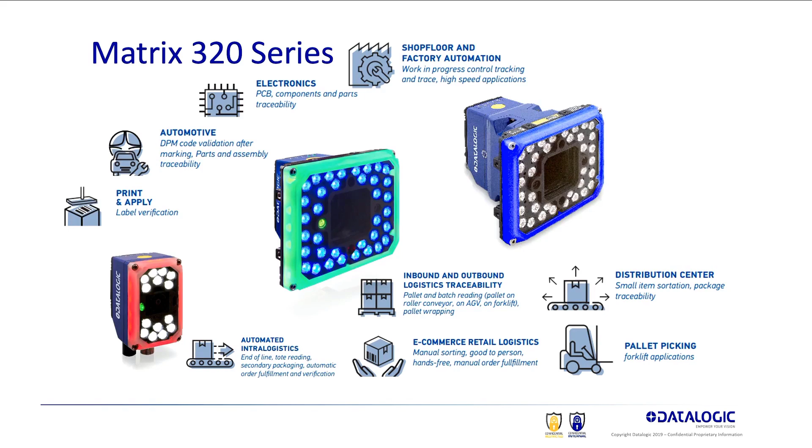Some of the highlights of the product: it uses a smart sensor, so we can detect low contrast images and still detect the barcode even if there is low contrast. We've got a multi-core platform, a dual processor that allows us to dedicate one processor to reading the barcode as fast and efficiently as possible, and a dedicated processor to image saving. When you have an imager, image saving is key. You might want to see the image in real time of what you're doing, or you want to use the images for forensics after the event. If you got a no-read, you want to be able to go and analyze the reason for the no-read or a behavior that's not expected by looking at the images.

One of the nice features of this product, which we'll see in the live demo, is the 360-degree light. It is a very powerful ring of light around the illuminator that turns green when you're successful and turns red when you're not. You'll see in the live demo how nice it is and what a nice feedback it is to have it on the reader.

Definitely. Always comforting when you see that green light happening when you're doing a machine setup, for sure.

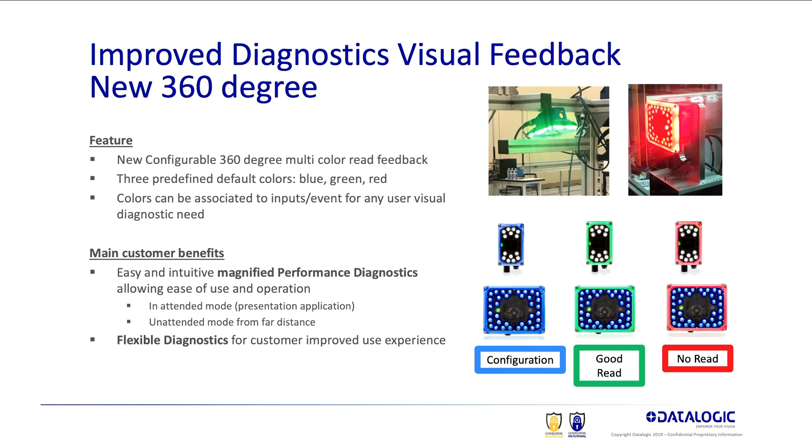One of the main applications of the Matrix 320 is for hands-free use. We have a couple of kits that Datalogic produces. You usually position the reader overhead, and it comes with a cable and power supply - everything is included - and a USB connector that connects to the computer the same as your handheld does. The idea is to replace the gun with this hands-free presentation. This allows you to have both hands free when you read a barcode, instead of having one hand taken by the gun and the other hand carrying product. This allows you to go faster, especially when you have big or bulky products that require both hands.

And having a USB connector, it communicates to the PC exactly like the gun. So from all the software upstream, it makes no difference to have a gun or to have a presentation Matrix 320. The last slide that I want to share with you is about visual feedback.

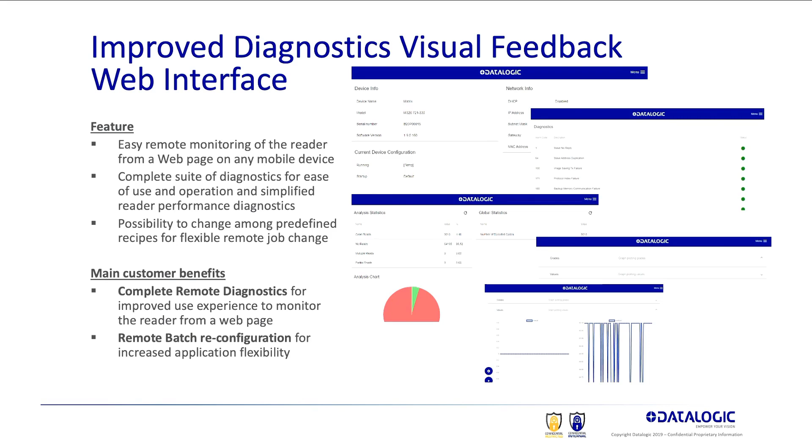With any browser, you just type in the IP address of the reader, which is connected to Ethernet, and it will come up with a window with different options where you can see the performance, see images live, and get diagnostic feedback immediately if something is wrong in the reader. Those green lights on your screen will become yellow or red to indicate a problem, so you get immediate feedback on how the reader is performing. You can see the barcode coming through, and that doesn't affect the performance, so all of this can happen during live production. This is one of the many advantages of Ethernet barcode readers.

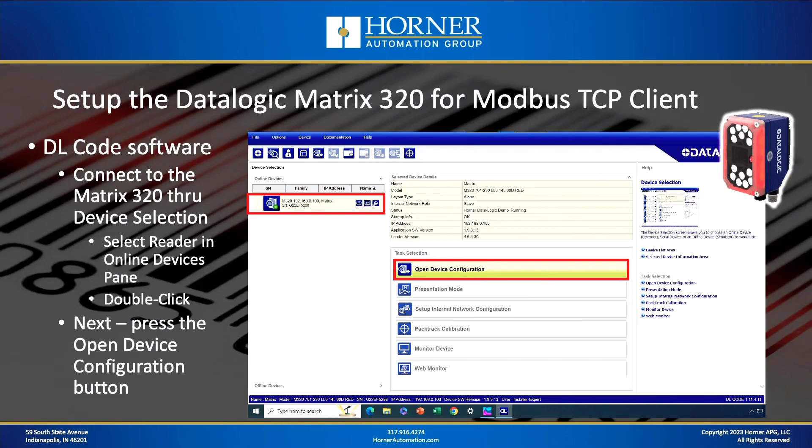Make sure you set the user level to expert, and you can do that right from the software. The next thing you're going to do is communicate or connect with the 320. Over Ethernet would be the most likely approach. It'll show up in the software along the left-hand pane. You double-click on your scanner as it appears, and then press Open Device Configuration to go into configuration mode. Once you're in configuration mode, you get a menu along the top with 1, 2, and 3 from left to right.

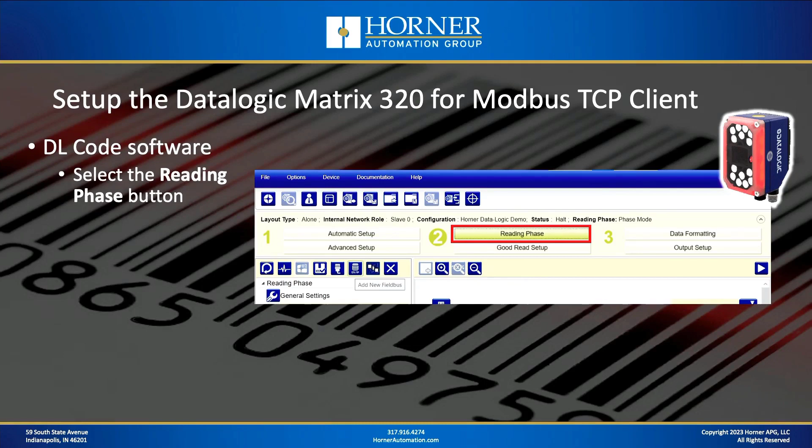You're going to focus by starting in on the reading phase. Select reading phase, and once you do that and you're in expert mode, you can click on a field bus icon that will be there and effectively add a new field bus. When you press that button, you're going to want to add Modbus client - that's what we're working with today.

Once you've got Modbus client added as a field bus, you click on Modbus client, and then on the far right-hand side, you're going to get all the Modbus parameters show up that you need to configure to get Modbus TCP working. So let's start with the key parameters that need to be changed, starting with the start register.

So what is the start register? By default, the barcode scanner will write the barcode data to Modbus holding registers 40,001 and forward. If you enter a start register of 0, that represents an offset of 0, which means the barcode data is going to go directly into Modbus holding register 40,001. Now, Horner OCS has a direct mapping of holding registers to internal Horner memory.

40,001, that particular holding register, is mapped to AQ1, and almost certainly there will be a conflict with other analog output data or high-speed counter data or something like that if you use that offset of 0, which is the default. So what I did in my demo, and what will probably work for you, is a start register of 99 - an offset of 99, which means the barcode data is going to appear starting at AQ100, and almost certainly there'll be no conflict in that area.

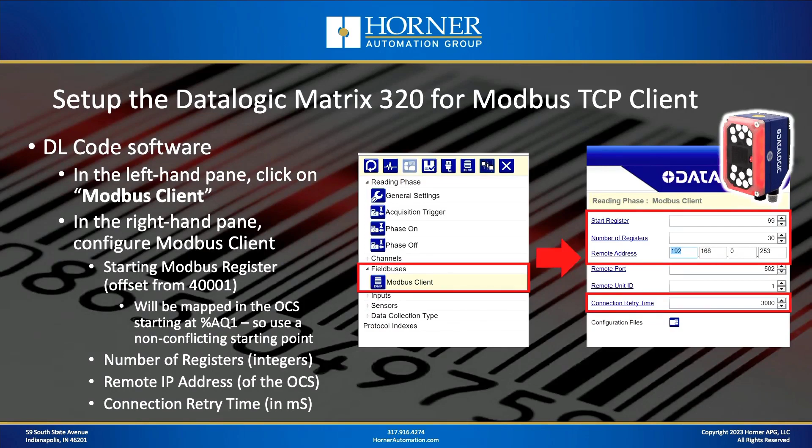That seemed to work very well. You could probably set it a lot shorter than that as well. So those are the basic Modbus TCP parameters for the 320.

All right, so we still have some work to do. We need to do some I/O mapping, starting with phase on. What is going to actually put the scanner into read phase, the phase in which it's sitting there waiting to scan a barcode? You're going to select phase on in the center pane, press that button, and in the right-hand pane all the different things that can cause read phase to turn on will appear. You're going to select one of the Modbus bits there as the bit that causes the scanner to go into read phase.

In my case, I selected the very first one, and that is not mapped to holding registers, it's mapped to input registers, or input bits. So in the OCS that means I1 through I8, bits 0 through 7 on the screen correlate to I1 through I8. In my case I made it I1, so that could effectively represent a real-world photo eye or something plugged into the OCS through I1, for instance.

Once you've selected which bit you want to cause read phase, you need to describe the action, and you want the leading edge of that bit to cause read phase to turn on. Now what will turn read phase off? That's the next slide. You click on the phase off button, and you select the very same bit that turned it on, but this time select trailing edge. So when that input bit turns off, you leave read phase.

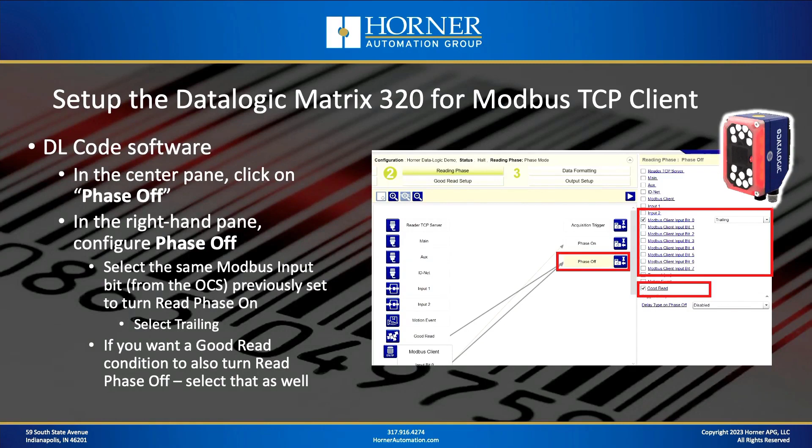One other thing that's useful, that Mitch, my local sales guy from Datalogic, recommended was that I also turn off read phase with a good read. So you turn it on with the input bit being turned on, and then as soon as it has a successful scan, it will turn itself off and go out of read mode.

A little bit of work left to do. We've configured the input side of things, what puts the scanner into read phase. Now we need to configure the output bits that are being written by the scanner to the OCS that give us status. The two simple ones are good read and no read. Let's start with good read.

In the center pane again, after we've pressed the output setup tab at the top, we press the good read button, and then we can map that to a particular Modbus bit. These will be output bits, mapped to Q1 to Q8, so 0 through 7 on the screen matches Q1 to Q8.

In my example, I selected the 7th bit to be used for good read, and that turns on, or is written, whenever a good read occurs. I also configured it to automatically turn off on a timeout, 1 second I believe is what I have it configured for.

Similarly, on the bad read, we also need to configure a different output, the bad read output, again correlating somewhere between Q1 and Q8. We wanted to turn it off automatically after a second or so. That's a good way to configure it.

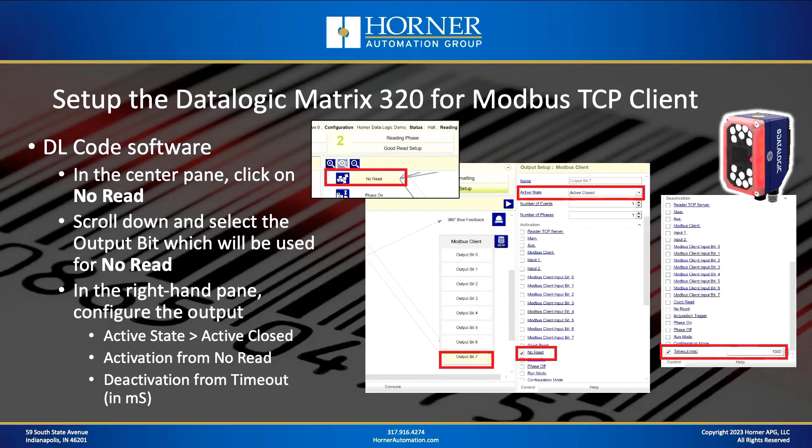When we're done configuring the output, that's the last step in configuring the reader. At that point we can save our file, save to the device, and exit the software, and things will just start running. That's my experience, at least.

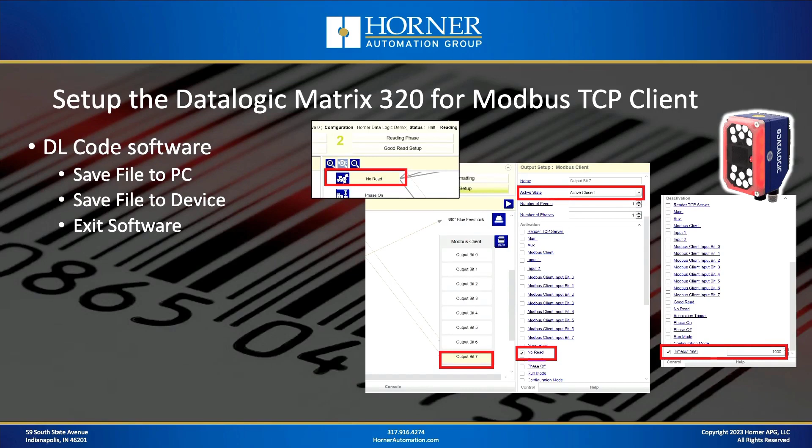On the Horner OCS side, remember the Horner OCS is acting as the server, so there's a lot less to configure. You basically go into the hardware configuration and click on the Ethernet port that is going to be acting as the Modbus TCP server.

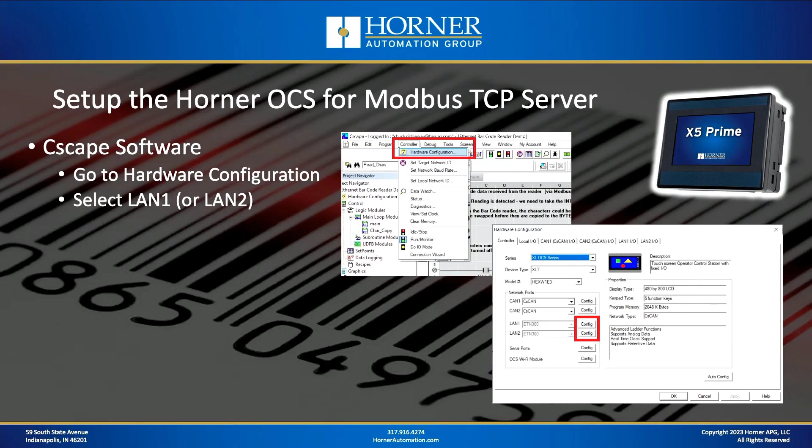Once you've selected that particular Ethernet port, you need to make sure your Ethernet addresses are set up like they normally would be, your IP address, netmask, etc. Once you've done that, all you have to do is check the checkbox for Modbus slave. Modbus server would be more appropriate, but it says Modbus slave.

Click on Modbus slave, and you're pretty much done in 99% of the cases. There are some additional parameters you could change if you wanted to, but I don't think it's even worth mentioning because it's not going to be used very frequently.

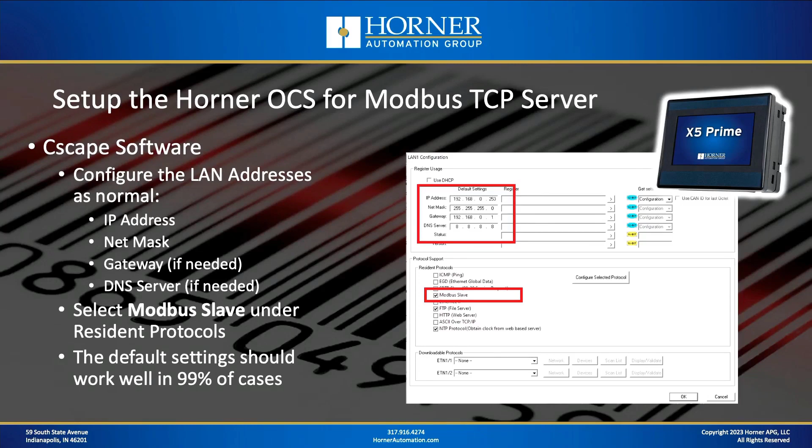Now what's going to happen at runtime? The OCS is going to turn on the digital input bit that is being read by the 320. That's going to tell the 320 to go into read phase. Once that happens, the 320 is going to read the barcode and write the barcode data to the AQ registers, which are mapped over Modbus. Once that's done, it's going to send a good read signal and write that to the %Q that's mapped over Modbus as well. After a second, that good read bit's going to turn off. So that's pretty much all there is to it.

Now let's talk for a second about data handling in the OCS. This barcode data, which is by its nature byte type data, is being written over Modbus, which is by its nature integer type data. So that means 2 bytes per integer. The Modbus spec is very clear in terms of the order in which the data needs to be written. It needs to be sent big endian, as they would say. The OCS is going to store that data in integers.

If you're using register-based advanced ladder, that's the older style Cscape advanced ladder, you don't need to worry about too much more. That's one of the advantages of register-based advanced ladder. The OCS will store the information as integers. You can use the ASCII function on integer data, and it'll automatically make sure the bytes are in the right order. There's really nothing more to do.

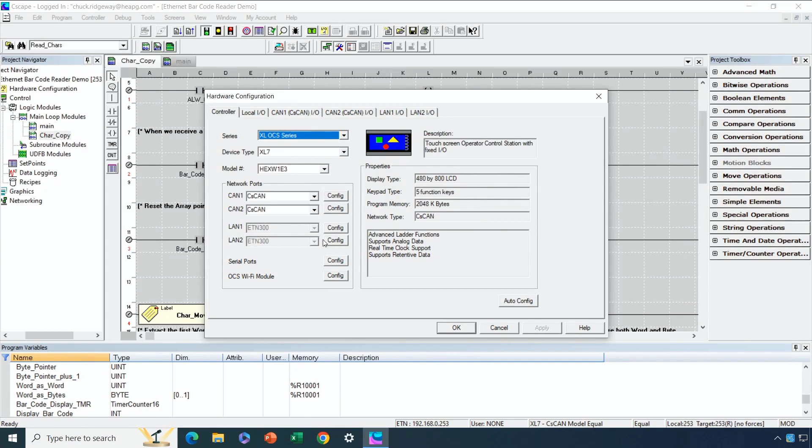Okay, so we're going to start from Cscape. What I have going here, we'll just quickly go through the Modbus configuration again. There's not much to it. We hit I/O configuration for the particular LAN port that needs to talk Modbus TCP server. We make sure our IP addresses are set up and that Modbus slave is configured. There are some additional things you could change, but rarely are you going to need to do that. So on the OCS side of things, that's about all that needs to be set up configuration-wise.

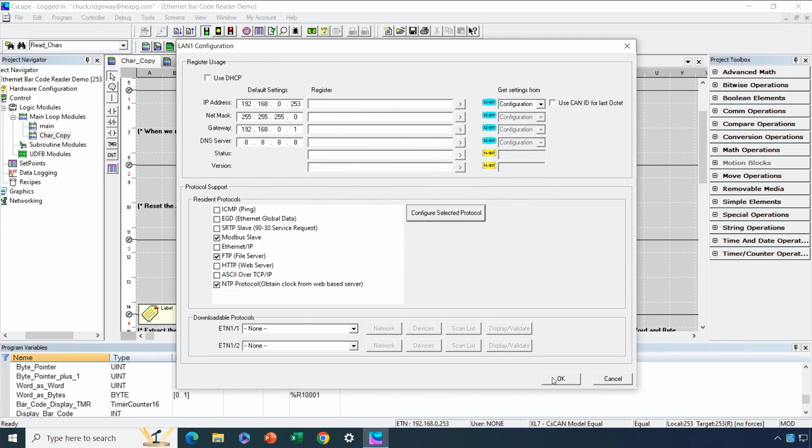Now, I did do some mapping, and this is variable-based advanced ladder that I'm using here for my demonstration. So let me show you some mapping that I've done of some variables. The barcode data is being written starting at AQ100, and there are as many as 30 words worth of barcode data, or 60 characters. So AQ100 through 129 is where the barcode data is coming in, and I've mapped that to a variable called barcode integer. That's where the data is coming in.

Now my good signal that says we got a good read, that's coming in and being written by the 320 to Q7 through its Modbus map. And the bad read is coming in through Q8. I've got both of those bits mapped over to internal variables as well. So that's really all the basic configuration that needs to be done on the OCS side of things. When it comes to unpacking the integer data into byte data, we'll come back and take a look at that in a second. Okay, so now let's go to the bench.

Apologize for a little bit of echo here, but here's the Datalogic Matrix 320. Let's take a quick look at this guy. First of all, it's made of a metal alloy, so really well constructed, very nice.

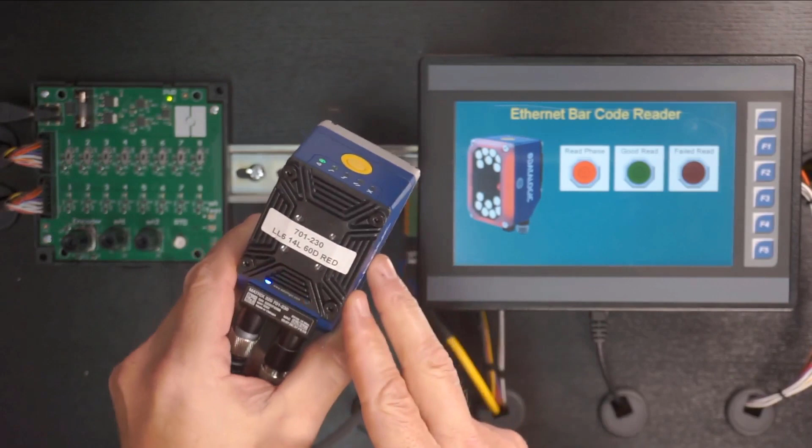One of the nice features I really like about it is this built-in express user interface, just a single button and a series of LEDs. If you just need to do a quick aim or quick focus, you don't necessarily have to drag your computer out to the production floor or fire it up to make that quick adjustment. That's pretty nice. Again, mechanically, this thing is built like a tank, metal alloy construction.

It's got some nice mounting holes on the back here to mount to a bracket in your application. It's also got a couple of connectors in the bottom: this multi-connector, which has a lot of I/O and serial port type connections, still supports those, and then this industrial Ethernet type connector over here. Again, M12 type connector suitable for being out in the middle of it.

Now it's also been applied here with my XL7. Both the 320 and the XL7 are connected to an Ethernet switch. My read phase bit, which is mapped to I1, right now for demonstration purposes, is only set up through this switch on my I/O simulator.

When I flip the switch on the I/O simulator, it's going to turn on I1 and we're going to go into read phase. I've got indicators here of good read and failed read for bits that are written from the barcode reader itself, and my data is going to show up here on the screen when I read. So let's do a quick read.

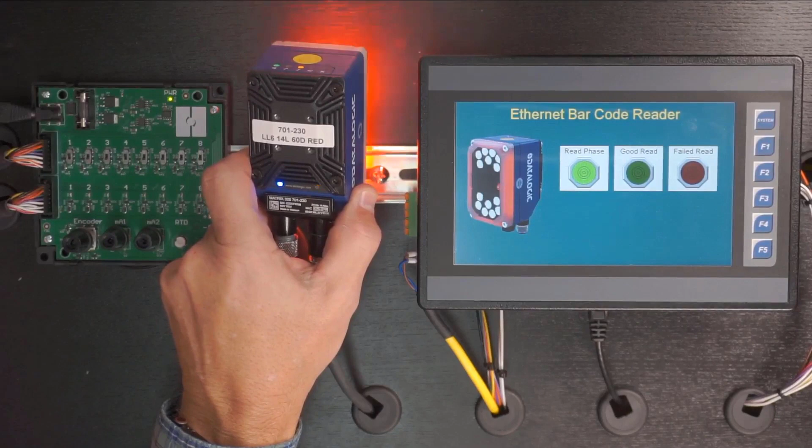I'm going to go ahead and turn it on and put it into read mode. You can see immediately you've got this indication that it's in the scanning process. Now let me go ahead and aim it towards the barcode, and it quickly turned green, illustrating that it had done the scan. My software actually makes the number go away after a few seconds.

Let's do another read. Again, we'll cycle the read phase button, or input one, which causes it to go into read phase. We have our good read, we have our barcode, and that's really all there is to it.

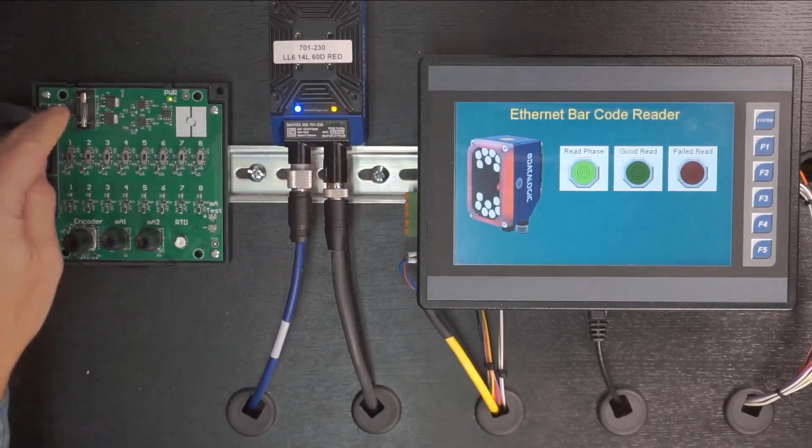Now, if for whatever reason you go into read phase—let's go back out and go into read phase—and you're not able to read the barcode, then you will get a failed read indication. So that's really all there is to it from a runtime standpoint.

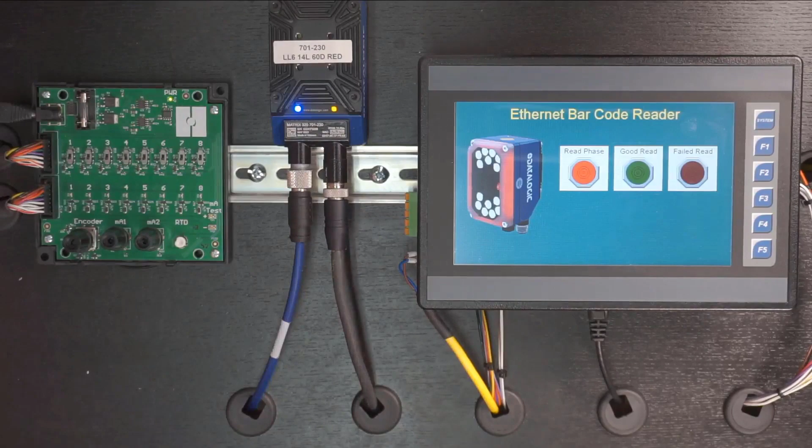Couldn't be simpler. Okay, now let's head back to Cscape and just talk about unpacking the integer data as bytes. So what do we need to do?

As I mentioned before, if you're using register-based advanced ladder, there's really not much to do. Even though the data was written in as integers, it's been put in the proper order by the 320, and all the ASCII functions will unpack it in the proper order as well. So there's really nothing else that has to be done.

But if, like myself, you enjoy using some of the advanced features of variable-based advanced ladder, this is one of the scenarios where it causes you a little more work to get some of the other benefits. So what are we doing in this unpacking?

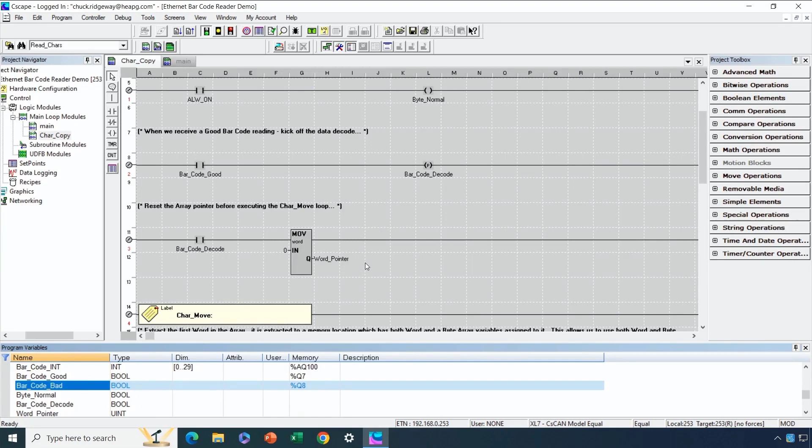Every time we get... well, first let me talk about byte order. If you're using most Modbus barcode scanners, and certainly a good quality one like the Datalogic, the integer data is going to be written in the proper byte order. But even if it's not, you can change this contact in my sample program to always off, and it'll handle reversing the bytes because the barcode reader didn't do it properly. But if you're using a Datalogic, you can just leave this as always on, because it writes the data in the normal fashion.

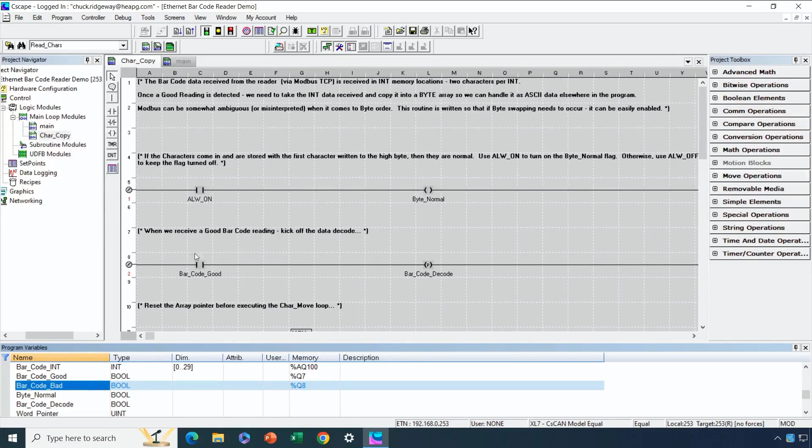Okay, every time we get a good reading, we're going to turn on a one shot, and then we're going to go through a loop, and we're going to unpack the integer data that was written by the barcode reader, and copy it into a byte array. So if we scan up to the top here, in my variable list, barcode integer is where the data is coming in, and barcode byte is where I'm unpacking it to.

So I did use a little bit of a trick that I want to tell you about. When going through the process of using indirect moves, as well as unpacking the integer-based data and then packing it back in as byte-based data, I did need to use a mixture of word and byte type functions.

To make that work, I have a word variable which contains each integer that gets unpacked as I go through the loop. It's mapped to a specific memory location, and I have a byte variable, just 2 bytes long since it's one word total, mapped to the very same location. That allows me to handle the bytes individually while having the same data represented in words handled in a byte type fashion as well. So a little bit of a trick there.

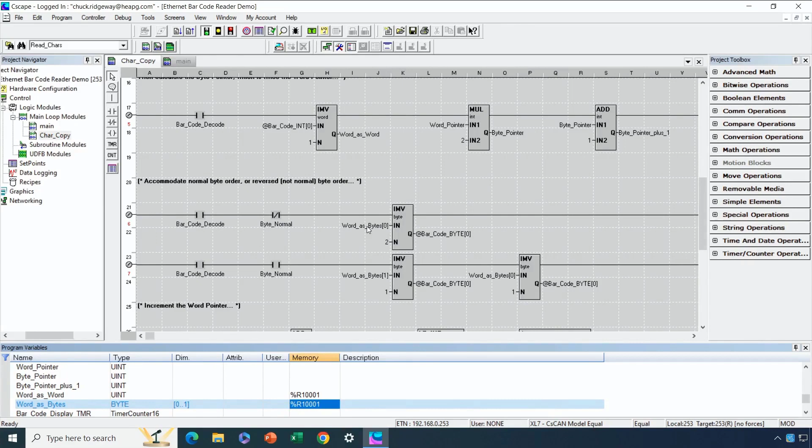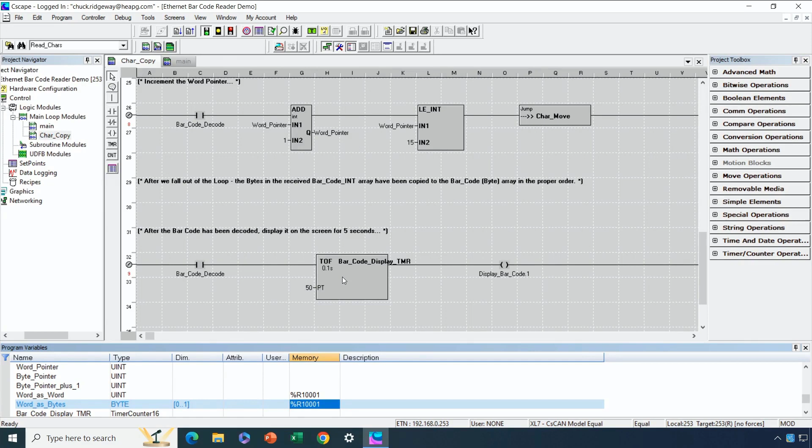Everything's well documented if you want to download the application and take a look at it. As we unpack, going through the loop 30 times quickly and get the information placed in the byte array, I've got a little bit of logic for displaying the results of the barcode read on the screen and then taking it away after 5 seconds. So that's pretty much all that's required, just a little bit of extra work there to unpack the bytes. But again, if you're using register-based ladder, you don't even need to do that.

So let's head back to our slides and do a wrap-up. What are the advantages of using Ethernet-based barcode readers? Well, it's much easier to add multiple readers, and it's got much more bandwidth, so it can certainly handle multiple readers just fine.

And you've got a lot of additional tools at configuration time and at runtime. The ability to see live images, the ability to see stored images, those are all advanced features you get because that data is available over Ethernet. That data is not going directly into the OCS. The OCS deals primarily with the barcode information, but that data is available for you to tap into from a web browser or elsewhere on the network.

And specifically today, we talked about the Datalogic Matrix 320 with its flexible Ethernet options, including Modbus TCP, Ethernet IP, and many other protocols. Of course, today we focused on Modbus TCP.